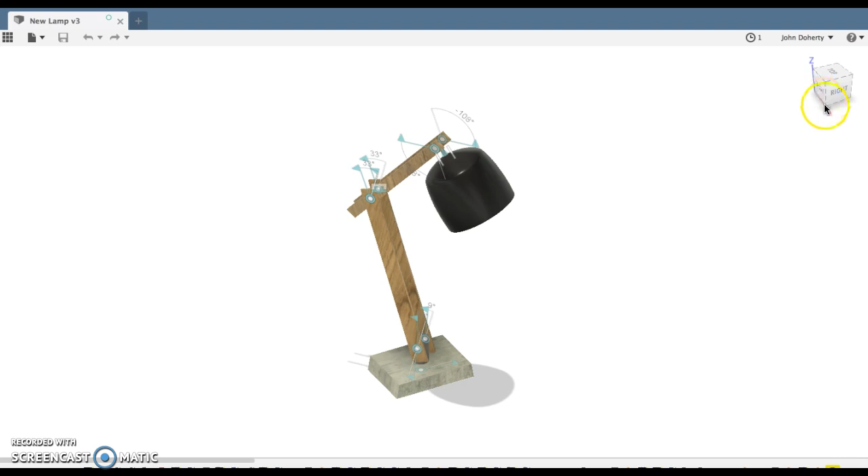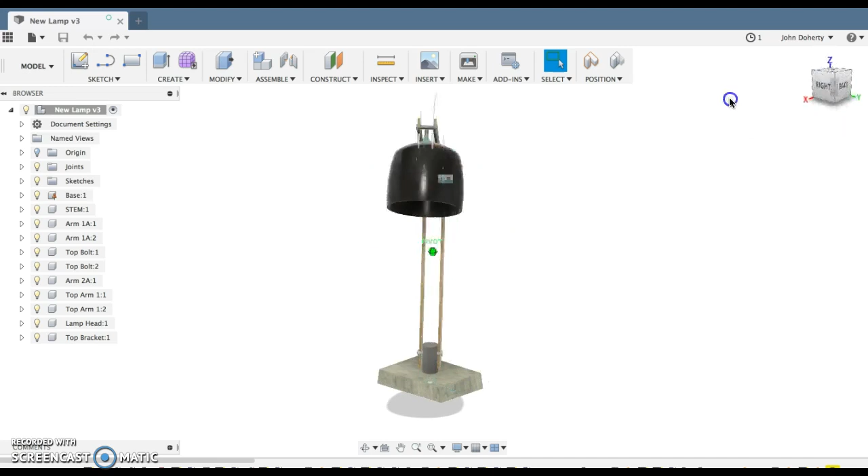Today we're going to look at using Fusion 360 to create a working drawing. This is an example of a bedside table lamp or study desk lamp that Year 9s have been creating, and they're getting to the stage where they're ready to create a working drawing. The purpose of a working drawing is to accurately represent how the object looks, its measurements, and the sizes of that particular object.

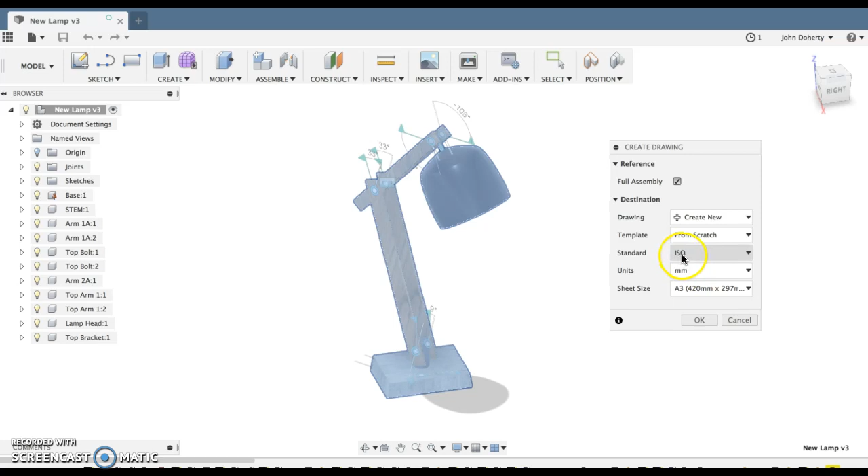So we're going to start by getting out of model space and into the actual drawing itself by going File, New Drawing from Design. A box appears here called Create Drawing, so let's have a look at that. We want a full assembly, from scratch, A3, units in millimeters, and standard ISO. We'll press OK and wait for that to load.

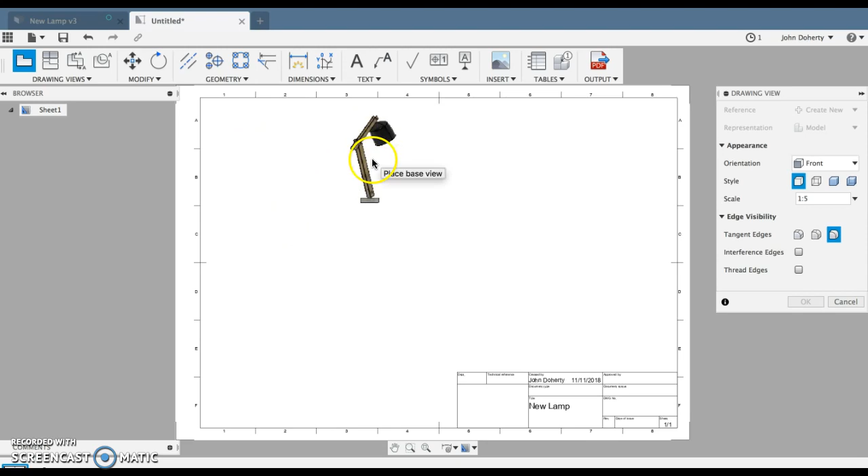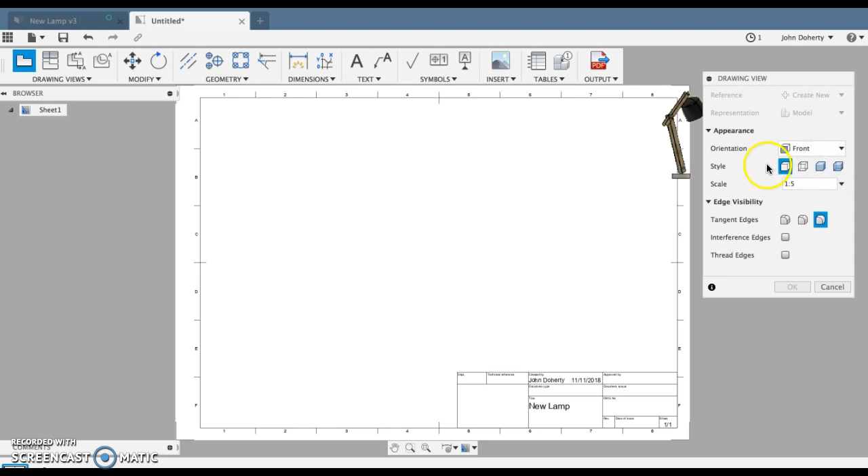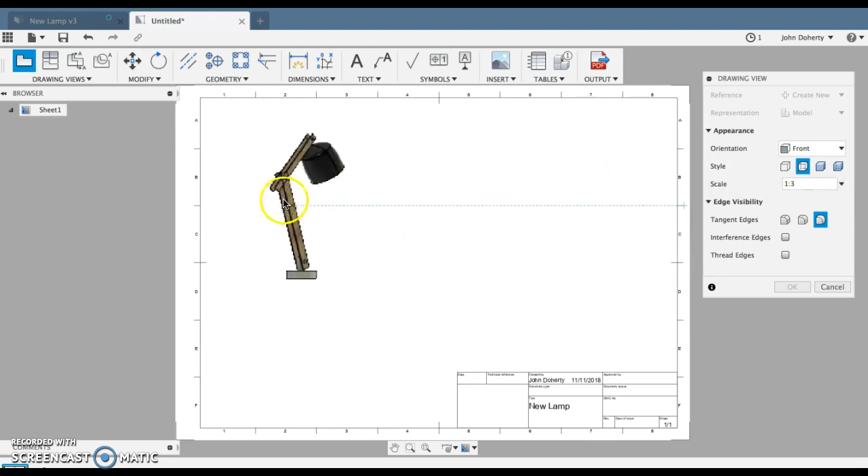As you can see, we've now moved to the drawing space, and automatically one of my drawings is appearing here. I've got a drawing view box which I'm going to go through now. We've got different orientations, so we'll start with the front orientation, or elevation, and go with the style visible with hidden edges, at a scale of 1 to 5. That's a bit too big, so I'll change it to 1 to 4, then try 1 to 3, which seems to fit even better. I'll place that down there, press OK, and there we have the elevation of the lamp.

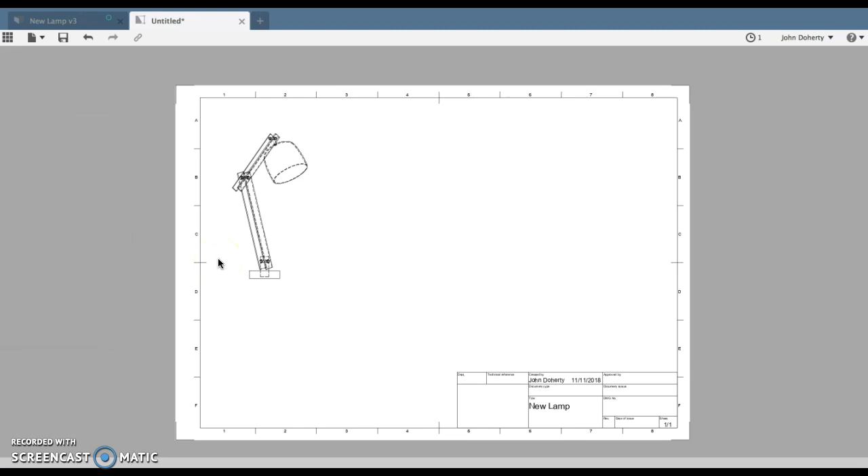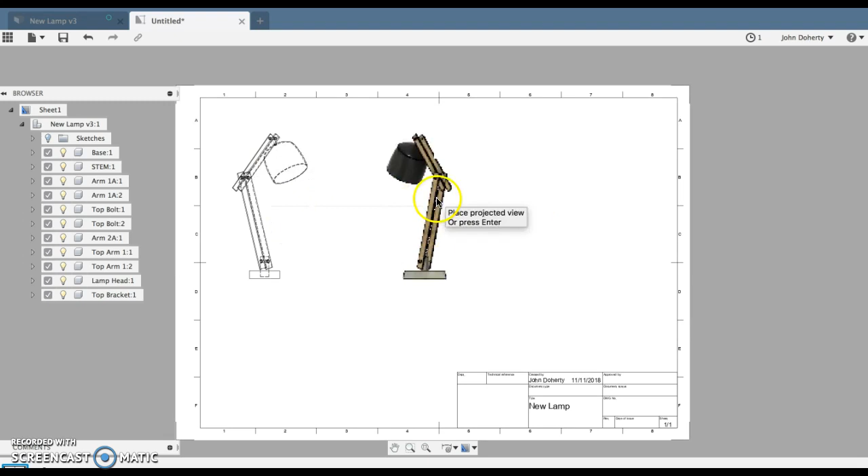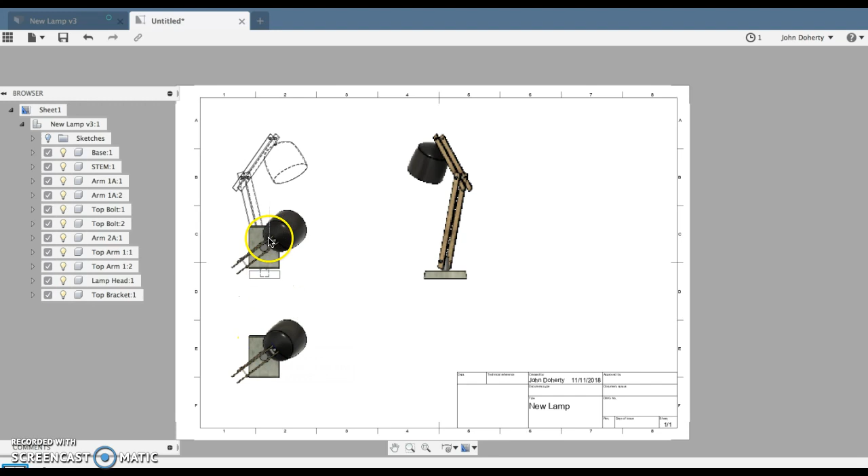Now that we've got one view, we can create a couple more. If we right click on our elevation, it gives us a number of options, but I'm interested in the projected view. By projecting the view, I can project different views, so I've got the elevation, and this would be the side view I can project here, and I can also project the plan. The grey line indicates they're all staying in line. So I've got one here for the side view, and I've got the plan, and I can even project the 3D view as well. There we have all our views appearing quite nicely.

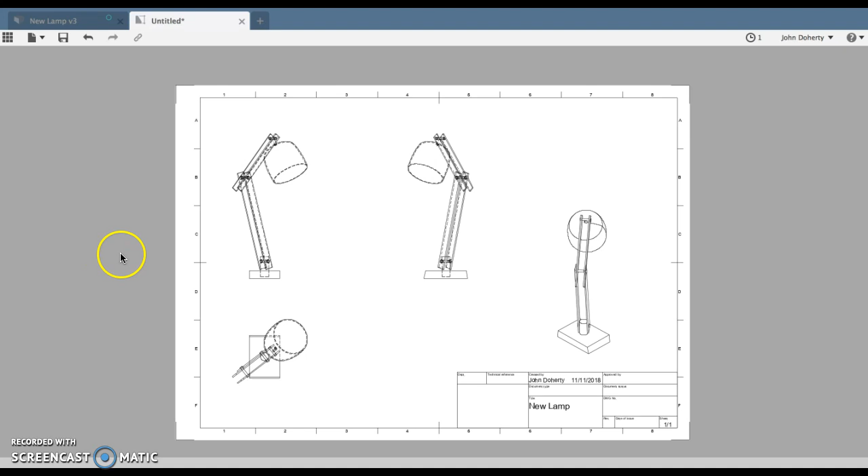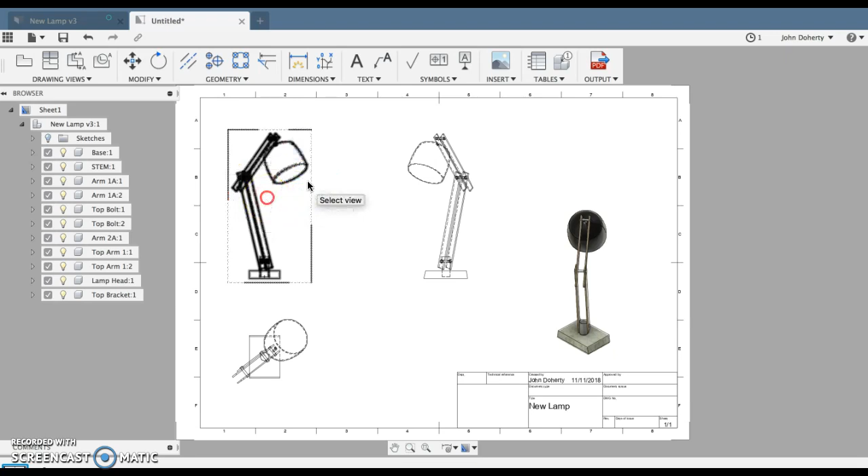Now there's a number of things I can do to some of these views. By right clicking on the views themselves, I can edit the view. So I can go back into the view and change that one, the elevation, so it's a fully colored render with the actual graphics on it. Even some of these other views, I can right click, edit the view, and change them to just visible edges, and the same with this one here. You get an idea of how the appearances differ from view to view.

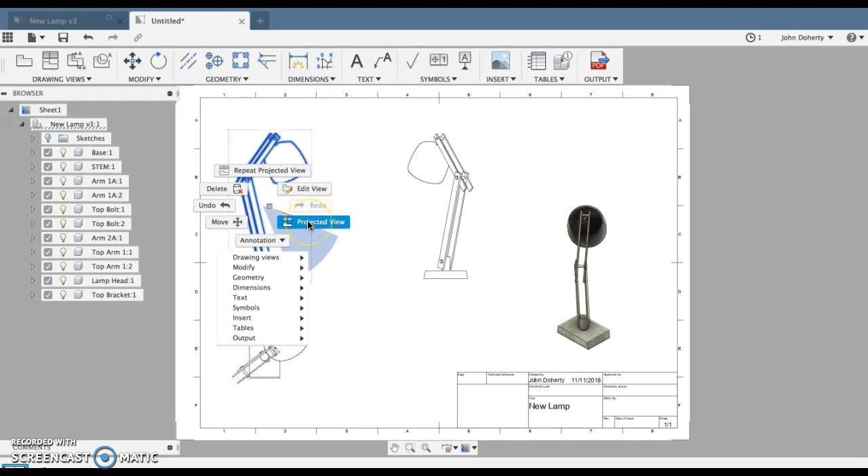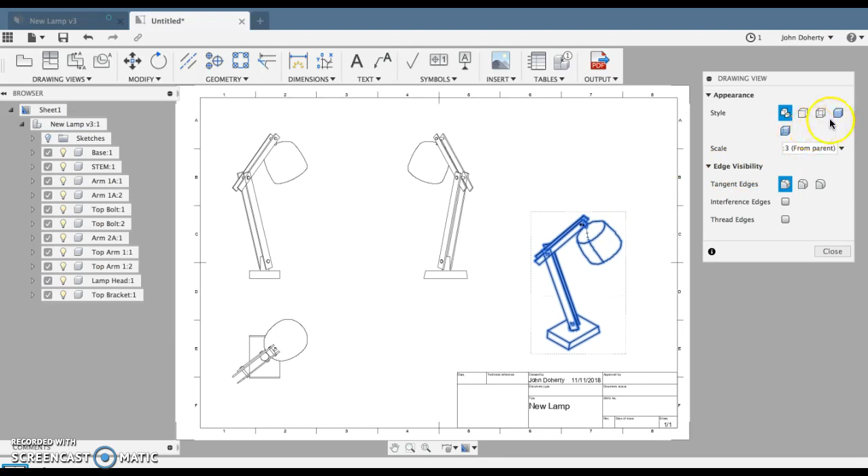Looking at my views here, I'm not quite happy with this particular elevation, as it doesn't show as much of the lamp as I would like. So I'm going to go back to my original drawing, right click, and go projected view, and this time drag it out to the left. You can see it gives a different projected view, so I'll press OK there, then delete this one, drag my new projected view in, and right click on it, edit the view, and change it so that it is shaded. You can see you get a completely different view this time.

The next logical step would be to start adding some other details to the actual working drawing. So I can go to dimensions at the top and start adding some accurate measurements there, adding a series of those to my drawing, and I can literally snap onto the sides and start projecting those out like that.

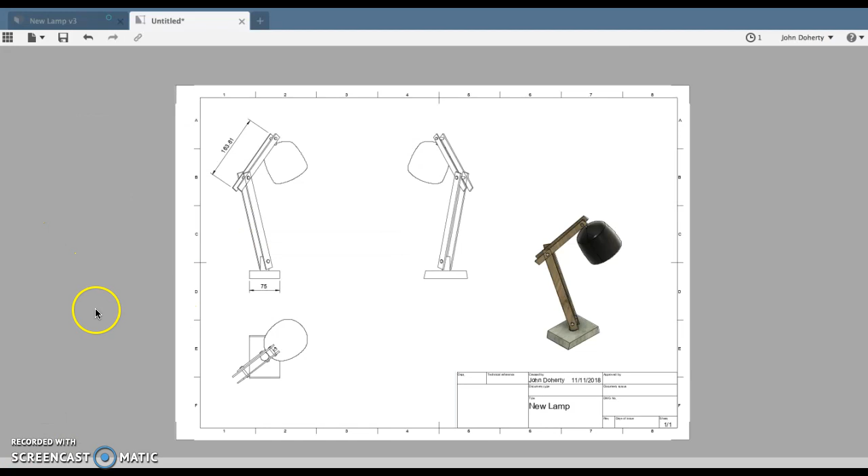Once you've got a whole range of dimensions on, the next thing you can look at is editing the text box, the information provided on the drawing. You can do that by double clicking on the text box, and it pops up with template information you can enter, like document numbers, page titles, department, and so on, giving the reader a whole range of valuable information about the drawing.

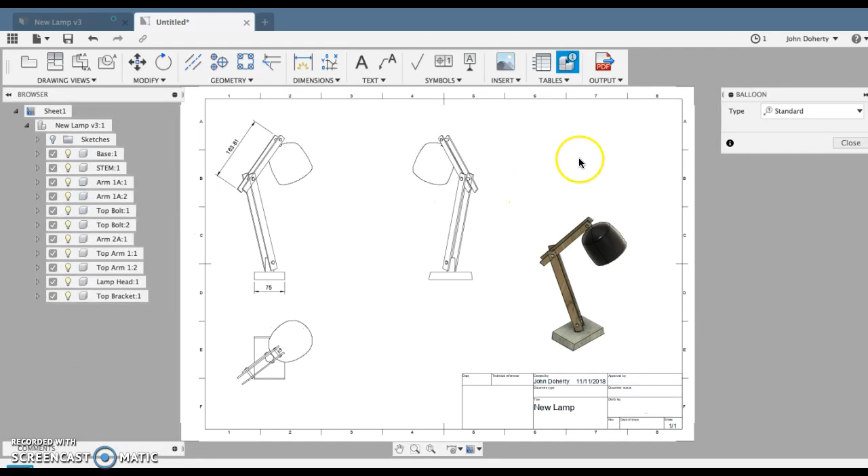Now, there are a whole range of other features you can explore when it comes to working drawings, but I think at this moment, this is enough for a Year 9 student creating their first working drawing to get a grasp of how to do it, how to export their file, and also how to create an accurate and technical working drawing with measurements and a complete text box with all the correct views.